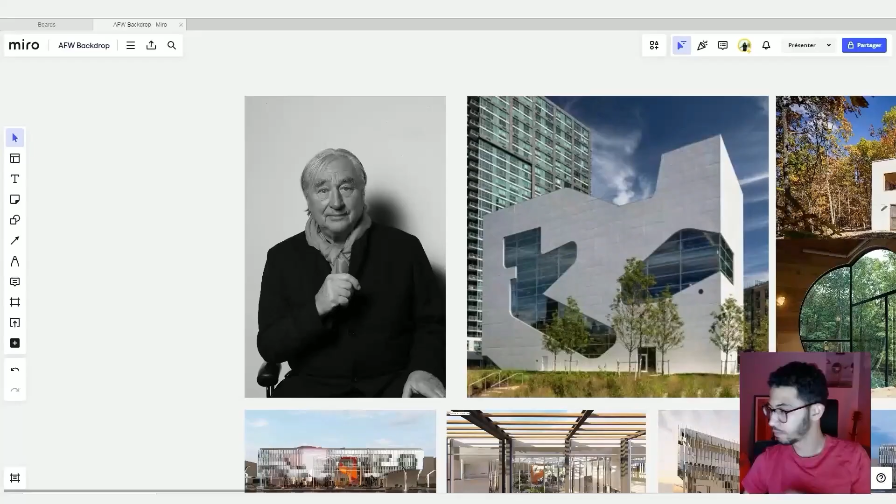My name is Mahmoud Ramdane. I am an architect based in Morocco, and I'm also a computational designer with a degree from the IAAC, Institute of Advanced Architecture of Catalonia. I'm having a very nostalgic moment right now, and so this is going to be a storytelling time.

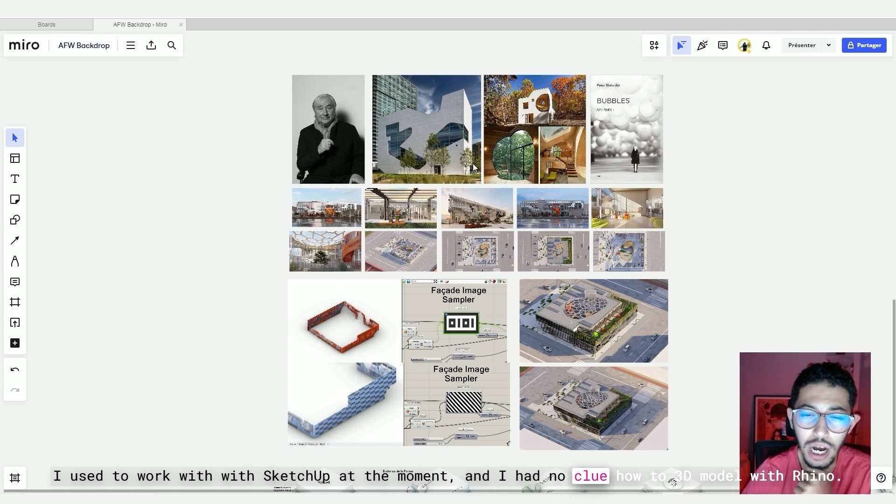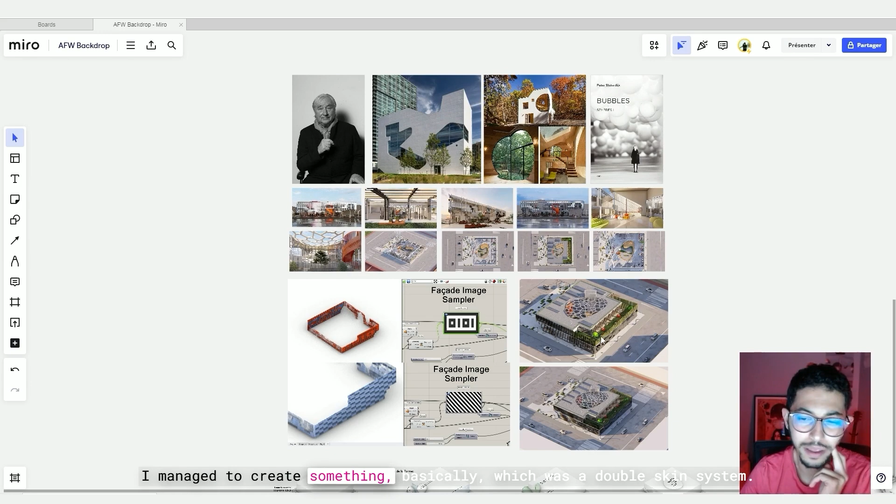I was studying in the architectural school, I think 5 years ago, when I decided at one point that I'm gonna start using Grasshopper. I used to work with SketchUp at the moment, and I had no clue how to 3D model with Rhino. All I knew was some little snippets, some little pieces of code I got from here and there, from YouTube tutorials and so on. And so it did work actually. I managed to create something basically, which was a double skin system.

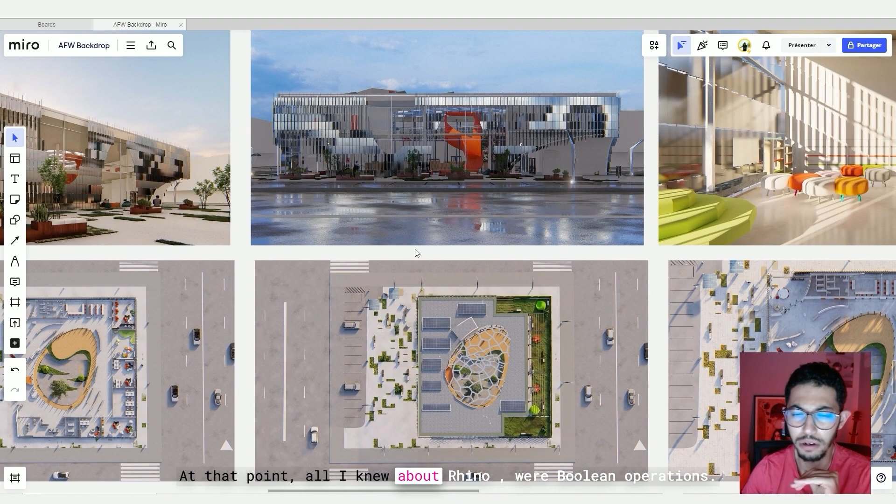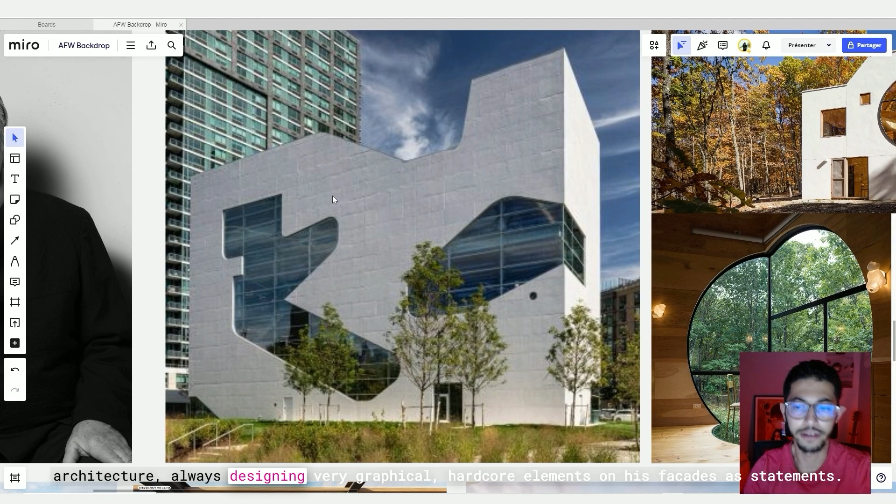So yeah, basically this is the project, and it was a competition that unfortunately we didn't win, but still it was supposed to be some sort of a smart library with smart components and so on. And so what we did is, we created form using Rhino. At that point, all I knew about Rhino were Boolean operations, and also being inspired by Steven Holl, and the way he makes his architecture, always designing very graphical, hardcore elements on his facades as statements. And what I like also about his buildings is that he uses a lot of spheres.

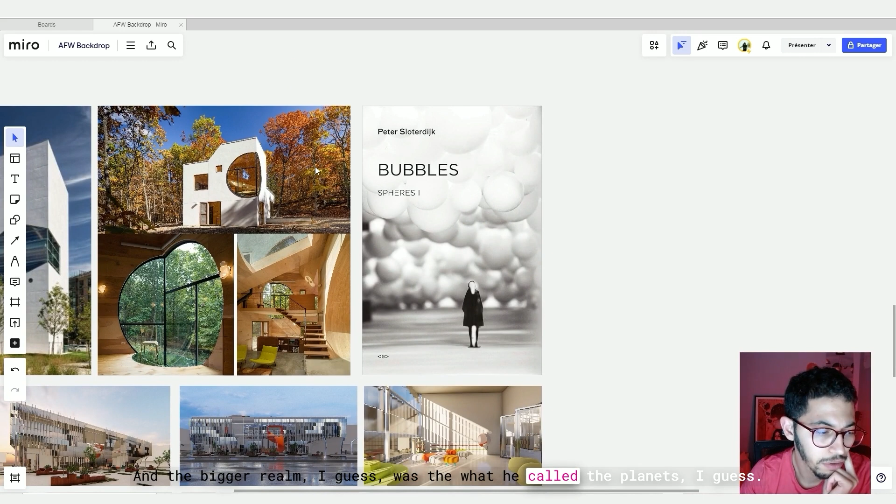I think I've heard in one of his interviews that he spoke about some book he liked, by a philosopher called Peter Sloterdijk, if I pronounced it right. The book is called Bubbles, where he speaks about being in this universe as intersections and meetings of many spheres, and each sphere has a center. And probably he alluded that societies are actually spheres on their own, with their own centrality, and so everything converges. He speaks of bubbles, the smaller realm, and the bigger realm, I guess, was what he called the globes. And the broader picture, when we zoom out, we have the foam, with multiple globes and small bubbles, etc. A very interesting take that Steven Holl actually uses in creating his own architecture.

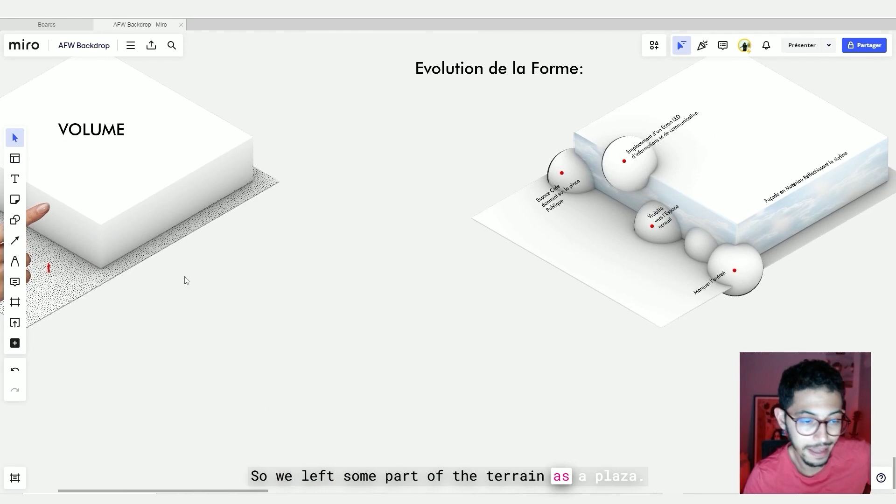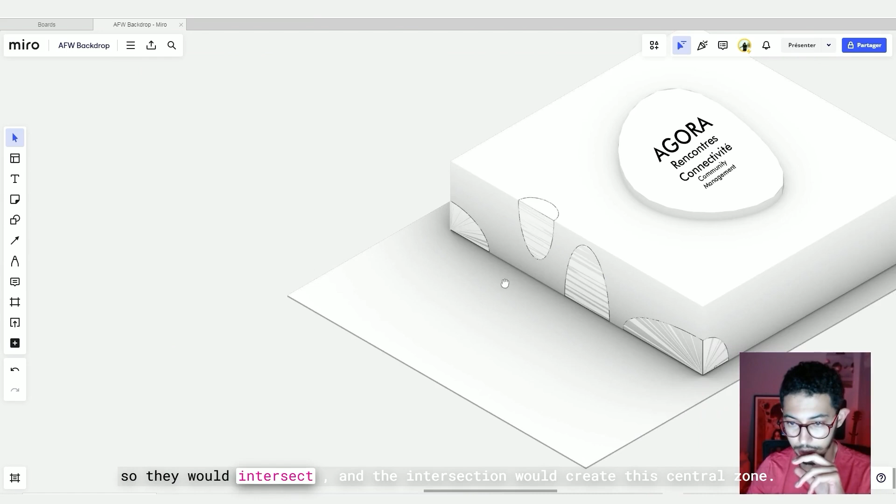And so at that point, all I knew in Rhino was actually to make Boolean operations. So speaking of this project, what we had was basically a volume. We left some part of the terrain as a plaza, and then we decided that everything had to have some sort of relationship using spheres that intersect this overall volume. And I wanted the facade to reflect the skyline of the environment. So basically just scaling the bubbles so they would intersect, and the intersection would create this central zone, etc. And then I would create the entrance, and many other things.

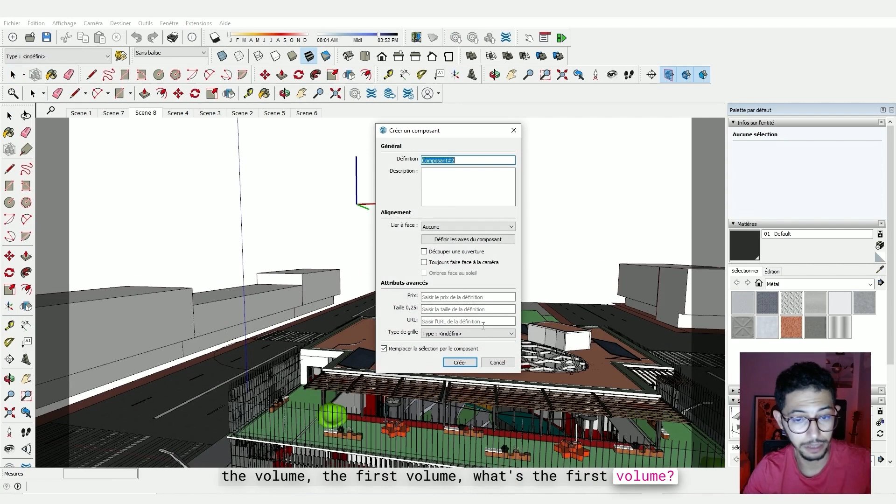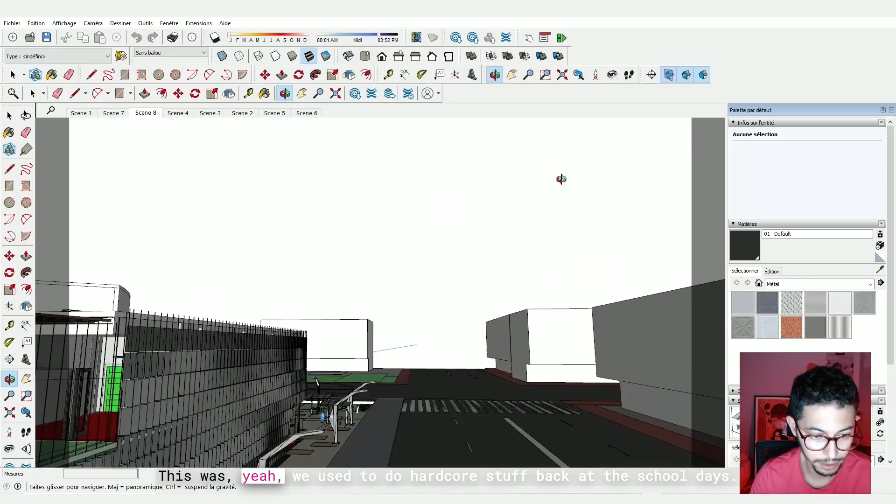And the second part was the double skin. So basically what I did for this project is that I made the first volume on Rhino, and because I didn't know how to use Rhino, I had to transfer my geometry to SketchUp in order to plug in my little components and families, 3D objects. And so you can see here that I have a full project. We used to do hardcore stuff back in the school days. We didn't sleep for this one.

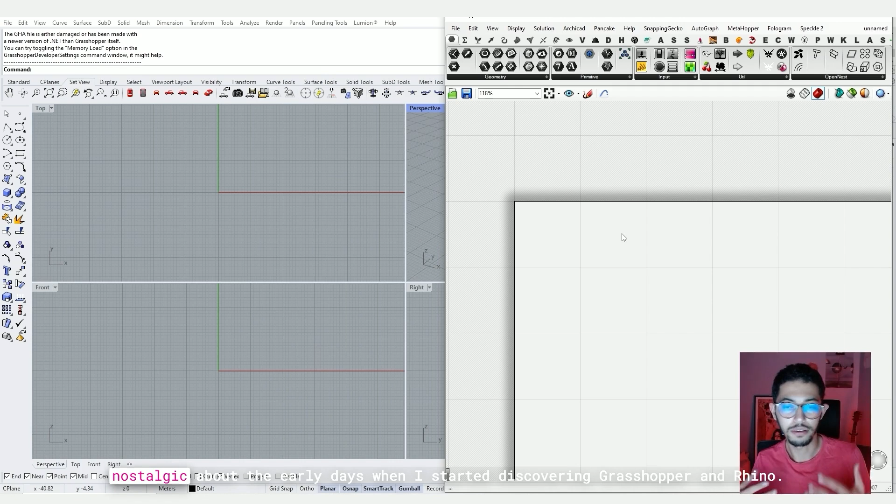Anyways, this is not why I am here today. I'm making this video because I'm a little bit nostalgic about the early days when I started discovering Grasshopper and Rhino. For a long time, while being a student, I only thought Rhinoceros was a software for modeling and Grasshopper was a software for crazy shapes and facade systems, etc. But as soon as I started working on my own stuff, I figured that no, that's not it. It could be something else. And it turns out that Grasshopper was so good at form finding. These types of diagrams were actually the steps that I used to think about my project.

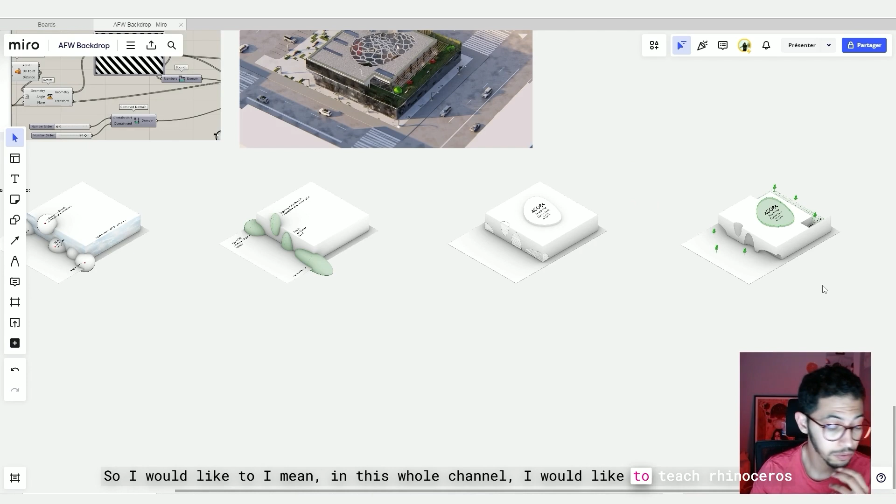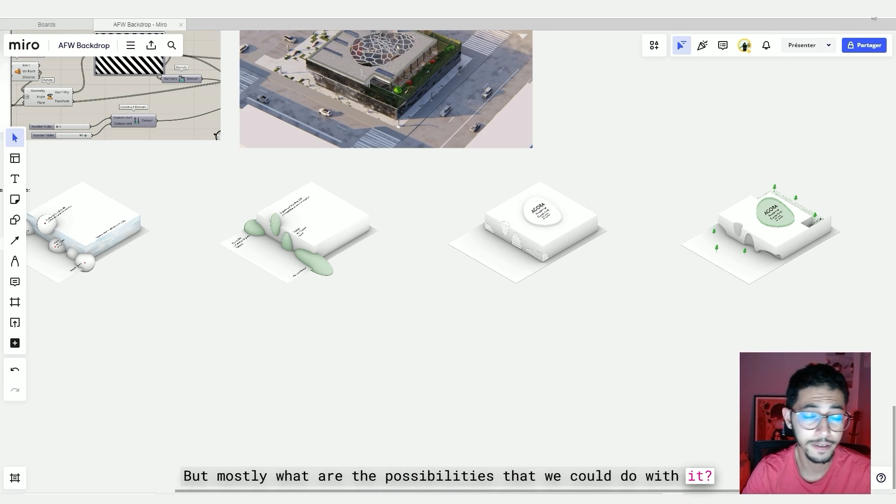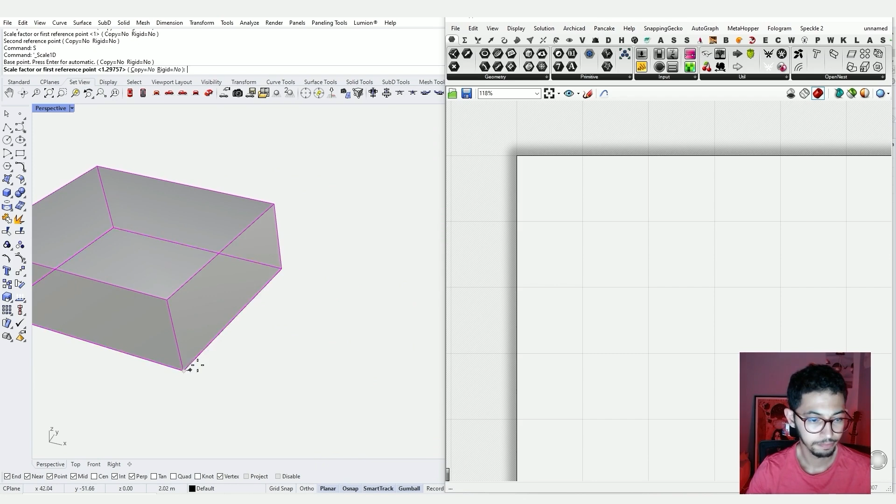So what I did basically is that I created this simple box. I'm just scaling it so it has some sort of a regular form. I have no clue how much is the height, so I would say the height is 24. That's too much, I guess. That's fair. And the length, let's say it's 35 by 35.

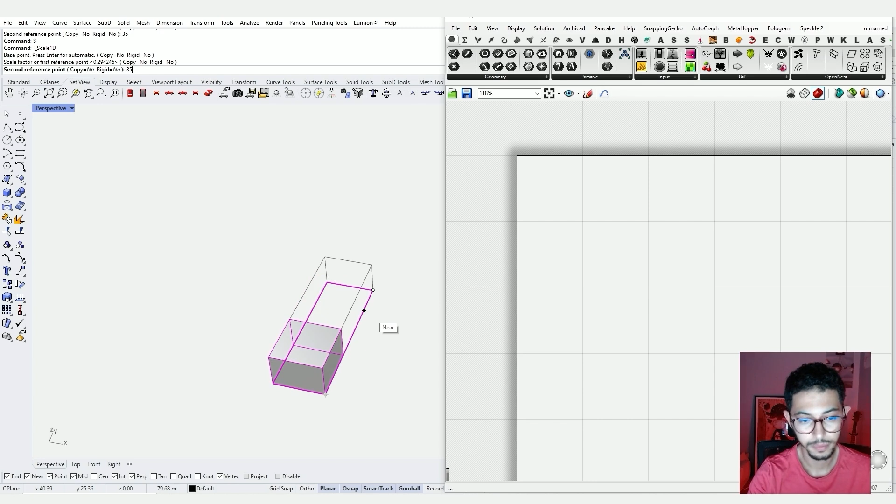Just using the command scale one direction. I'm gonna zoom the selection by using ZS, which is the shortcut for zoom selection, and then scale one direction again. Maybe I would want a 15 meters high building.

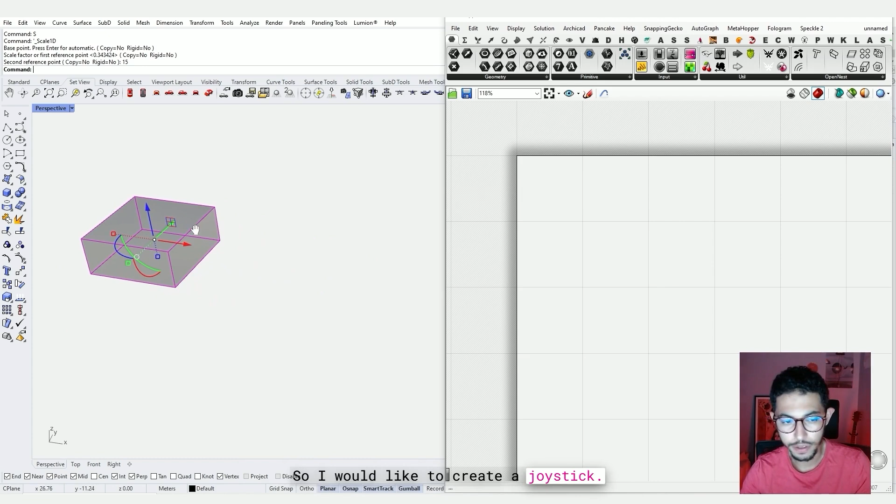So yeah, how can I use Grasshopper in this case? I would like to create a joystick. What do I mean by joystick? I would want to create some sort of a video game here. So I would start creating my spheres, right? And as I create those spheres, I want to see how they react once we make a Boolean difference and what type of space they leave to us.

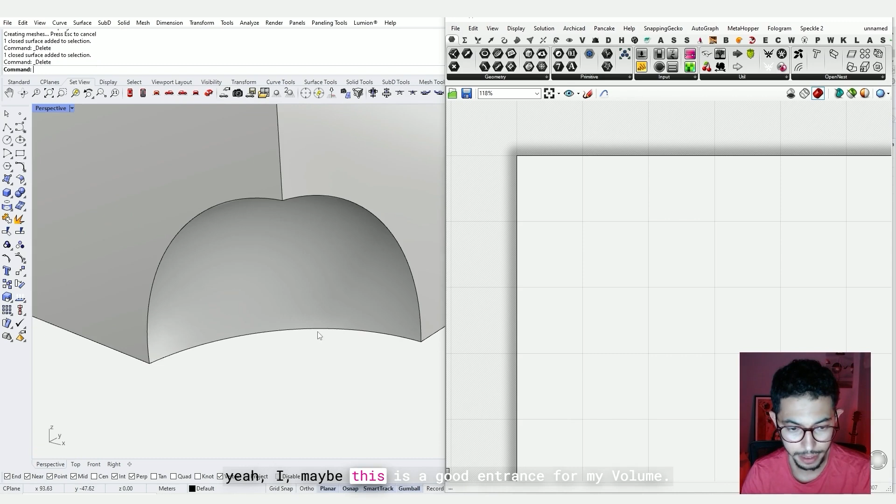So I just launched the command Boolean difference. They're asking me what are the Boolean surfaces to subtract from. I want to subtract from this one, yes, using these two guys here. And now if I delete these two, you can see that maybe this is a good entrance for my volume. Now I would isolate this volume and I would like to contour it.

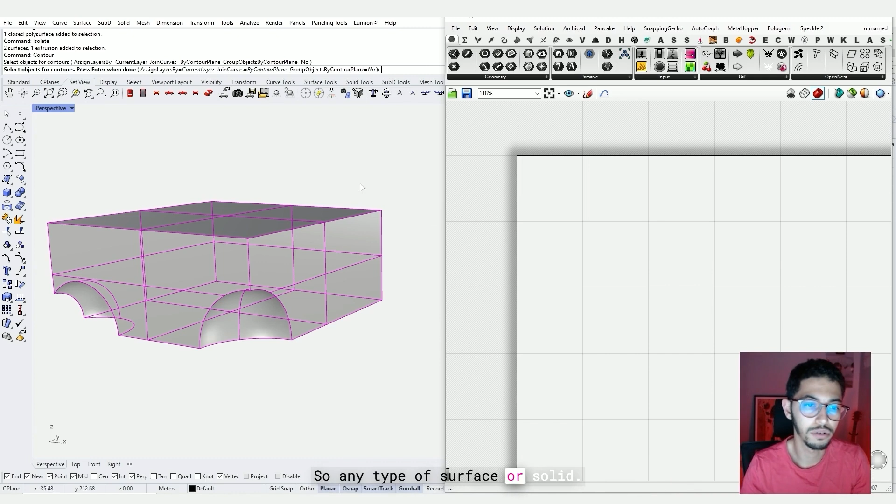So contour is a command that allows us to select a solid. It should be actually, oh no, it doesn't have to be. So any type of surface or solid. And we decide the starting point and an ending point, and then we decide what is the height, for example, of our levels. Let's say I would like to have 4 meters high levels. So it creates these polylines, actually, that I can then turn into a surface.

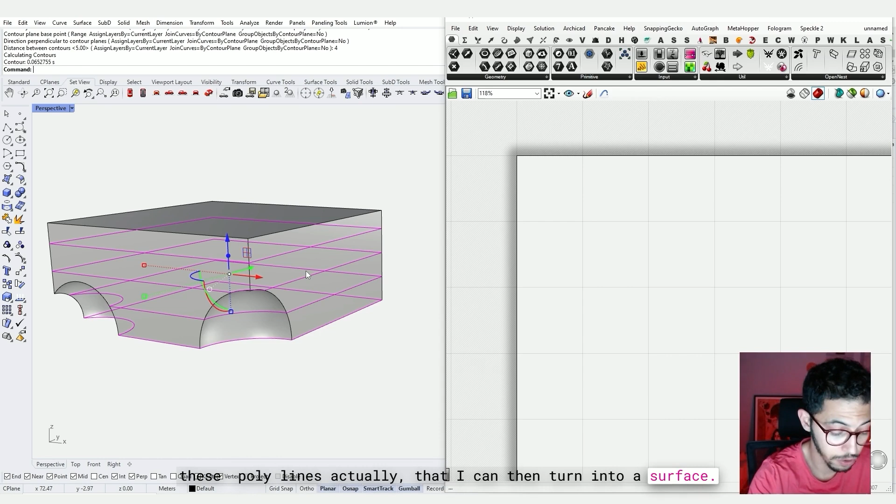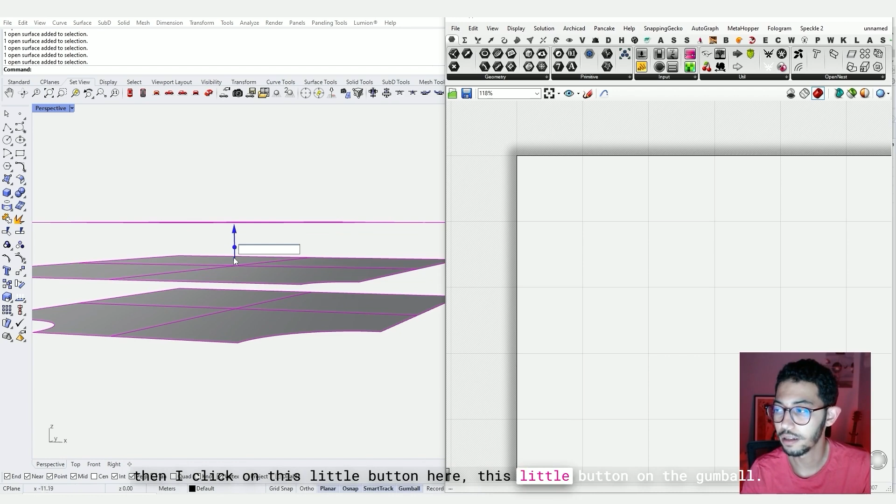Before turning them into a surface, I would isolate them also, and then turn them into a surface. Maybe delete the first one, and then just pick the surfaces, by holding shift, the 3 surfaces, and then I click on this little button here. This little button on the gumball will allow me to extrude in the Z direction, upwards.

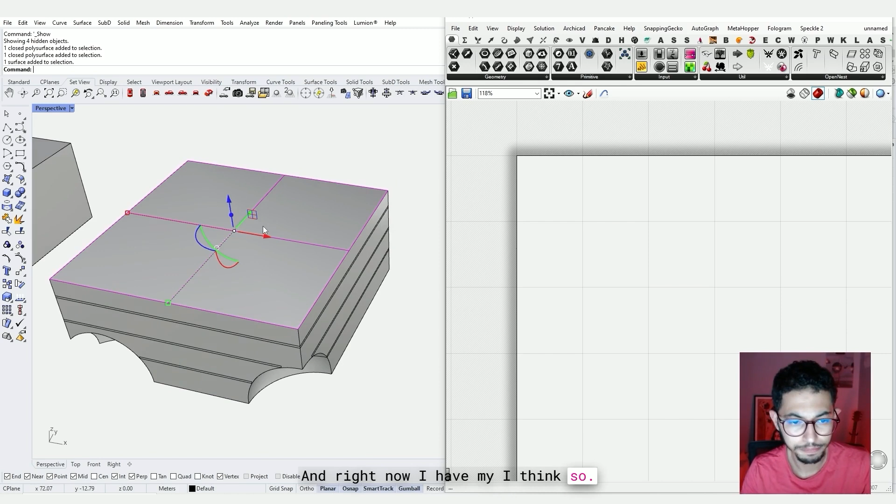If you cannot see this gumball or these arrows, you need to come here, down here, and activate it so it turns bluish. So right now maybe I would set 0.3 for the slabs, and right now I have my thing. So yeah, now let's analyze this. Here I have a full slab. Great. Here I have a full slab, but what is this?

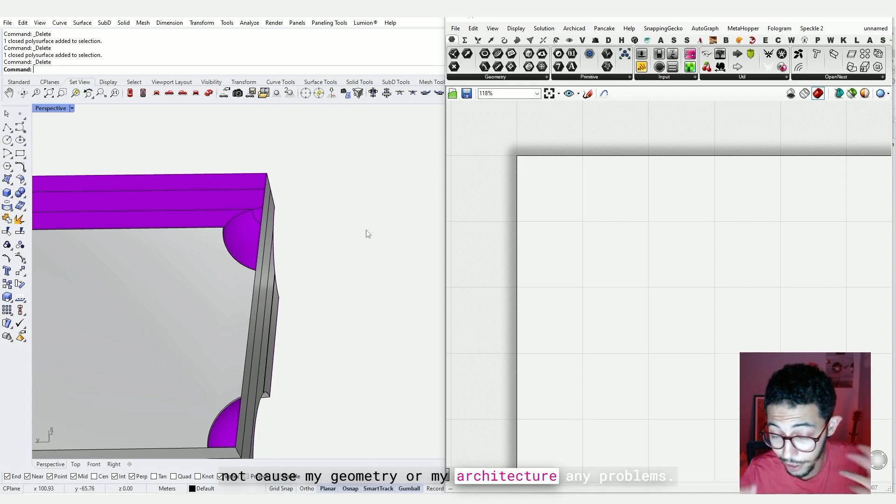Could this be beneficial for me? I don't think so, architecturally speaking. No one could sit here and watch something going downwards. There's no need for creating this half-assed circle. So probably this Boolean should have been way more well thought out in its exact place. So these are my conditions. I need to place my spheres in spots that do not cause my geometry or my architecture any problems. So this is why I opened Grasshopper.

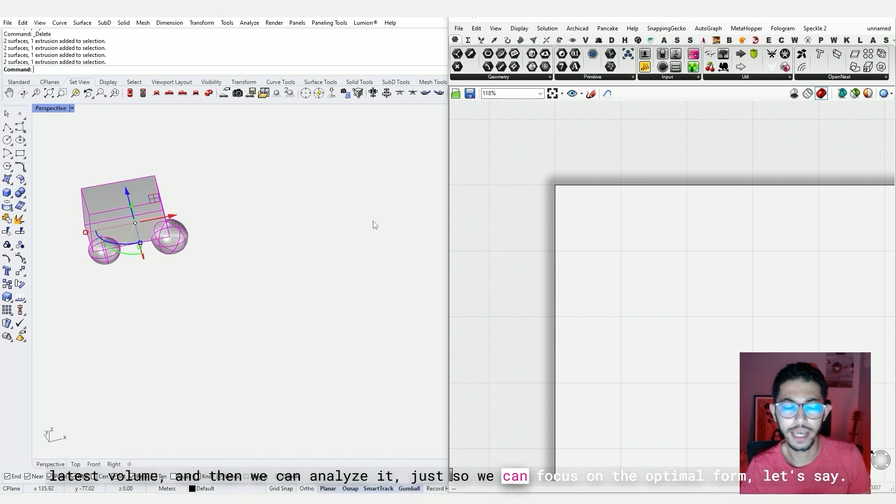So we would start generating some sort of a joystick, like a video game thing, where we can start drawing stuff here on Rhino, and at the same time it would show us the latest volume, and then we can analyze it, just so we can focus on the optimal form, let's say.

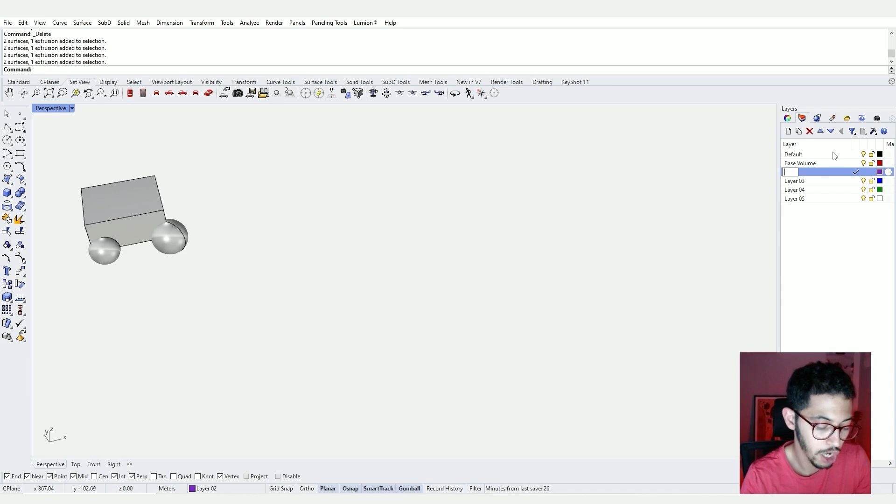Great. So before I start using Grasshopper, I would like to do some organization. I will go through my layers and call the first one base volume, and call the second one carving volumes. It's like we're carving the volume, right? So my carving volumes in this case are the spheres. So I'm going to select the spheres, hold shift to select multiples, and click and then change object layer. And also for this one, because it's my base volume, change object layer.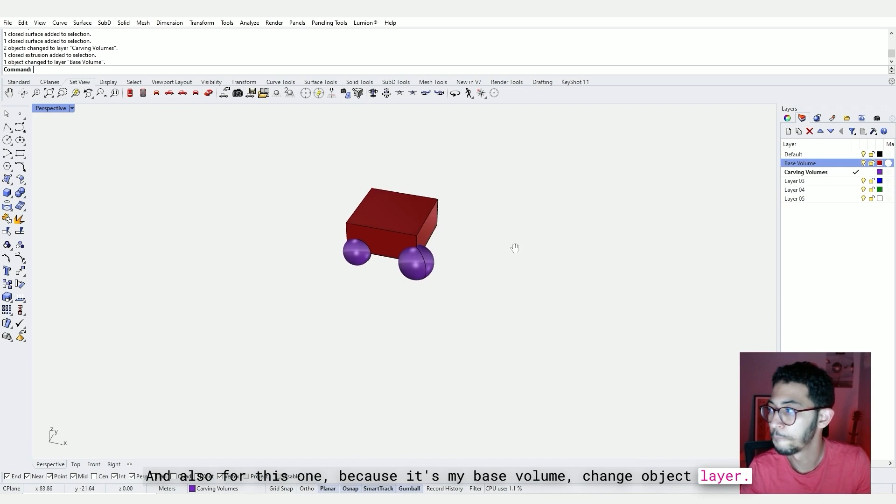And so I want to be here on the carving volumes layer. Now you see it's my current layer. That means anything I'm gonna draw is gonna be on this layer. Why? Because we have this little tick in here. No worries, let's see this later.

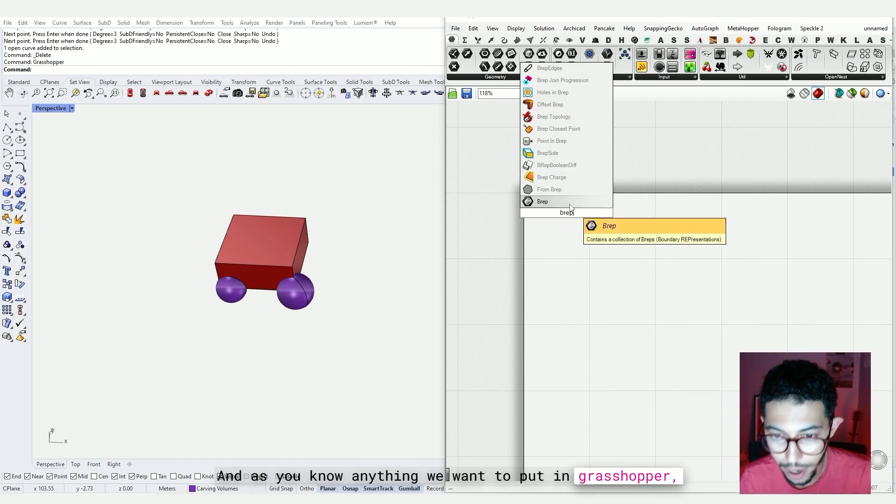So I open my Grasshopper, and as you know, we will need to reference these geometries inside. So in order to reference any geometries, we should come to the params tab and then look for the brep, which is actually short for boundary representation. Let's understand it this way. Anything with a boundary, anything that's solid or surface, can be integrated in this little library.

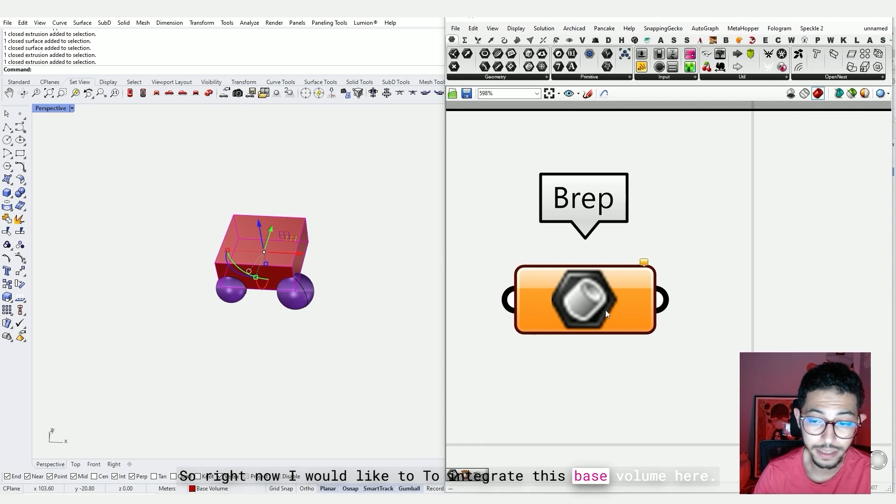And you can also see that it's yellowish, I mean orange, which means that it is empty, or that there is a problem. And this little balloon tells us that the brep failed to collect the data, which means there is no data to start with. So right now I would like to integrate this base volume here. So I right click, and then I set one brep, boundary representation. It turns gray, that means it has information.

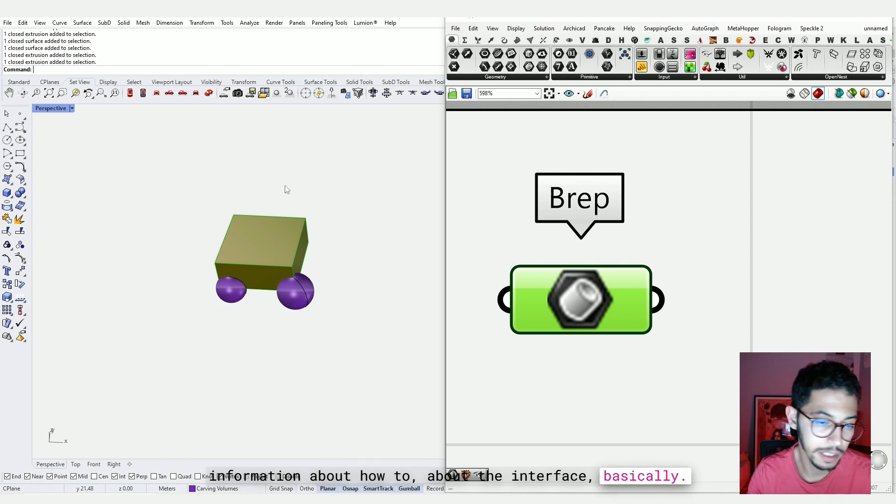I'm gonna start rushing from now on. And if you didn't see my first videos, I advise you to look at them really fast, because those are the ones with the basic information about the interface, basically. And so right now I need to name this, so I'm gonna Control G it, then right click and call it base volume.

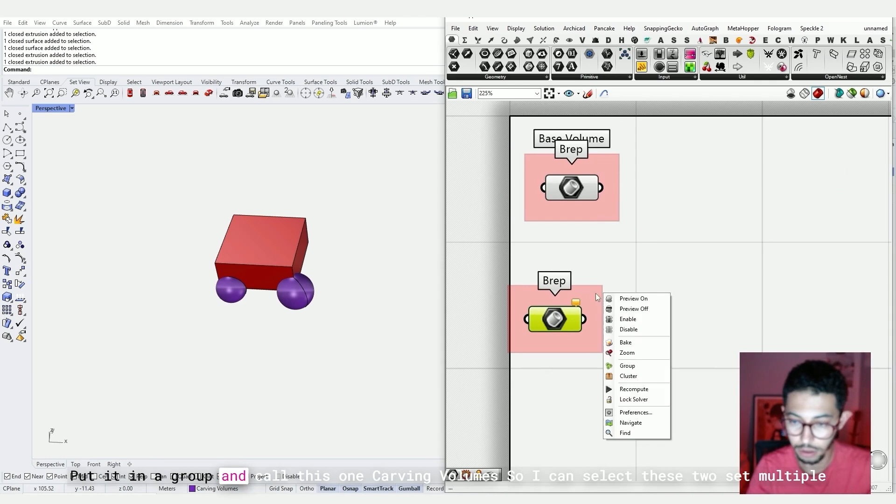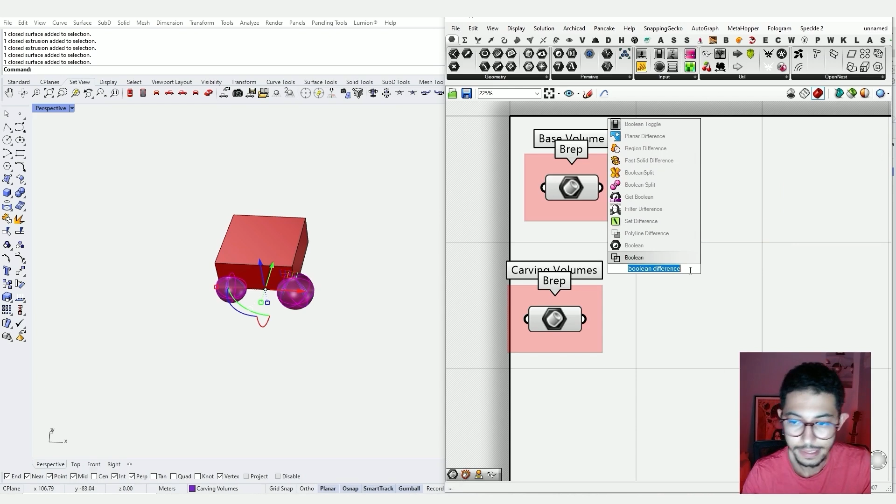Right, and then I'm gonna create another one, put it in a group, and call this one carving volumes. And so I can select these two, set multiple breps, and then use a boolean difference, right? Difference. I mean, it should exist, right? The thing is, in Grasshopper, it's called solid difference, not boolean difference, solid difference.

So brep A is the yellow one, it's the one that's getting cut. So the first one is the base volume, and the carving volumes are the B. Great. So now I notice that there is something that's happening. We have overlap in geometries.

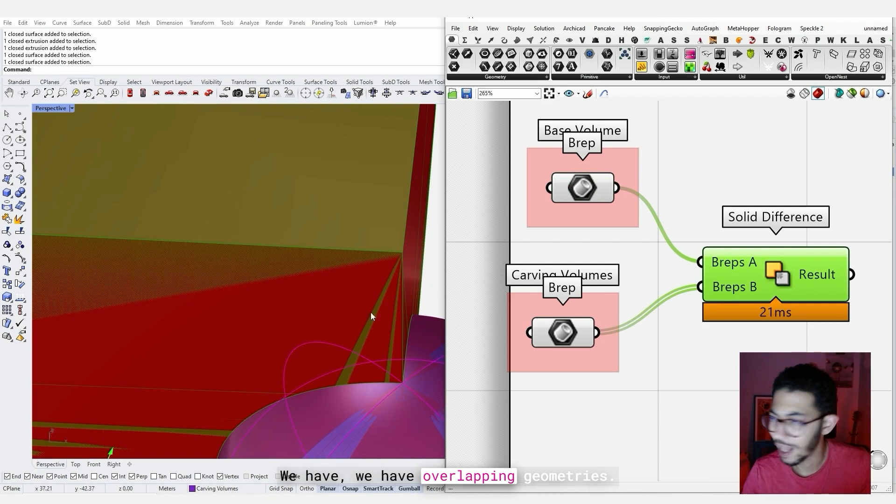Let me hide everything that I've already drawn on Rhino. And also let me deactivate the preview for this one. It turns dark and gray, which means the geometry is there, but it's not visible. Nice. And also I would do this for this one here. Preview off. You could use Control Q for it to be fast. And so what I see here is actually my geometry.

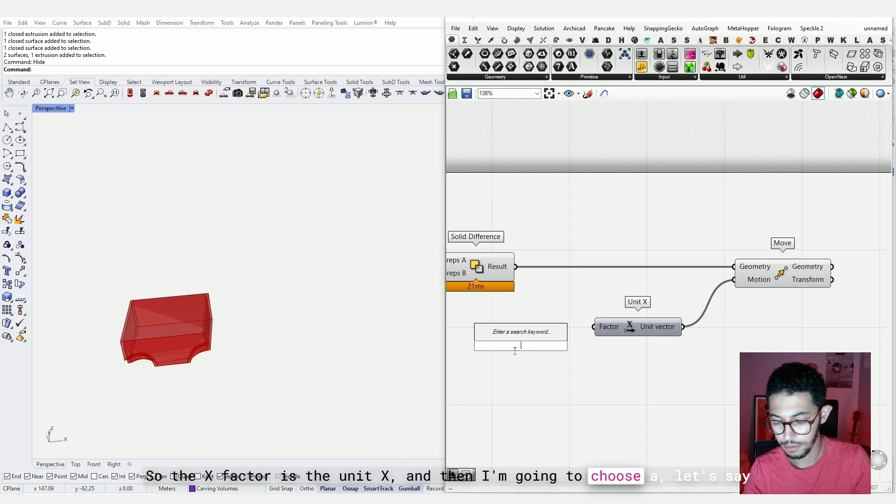And what would be interesting also is to move my geometry somewhere in the X vector. I'm gonna move it left or right, wherever. So the X factor is the unit X, and then I'm gonna choose, let's say, 30 meters. Let's move it by 30 meters, maybe a little bit more. For that I called a number slider. Remember that.

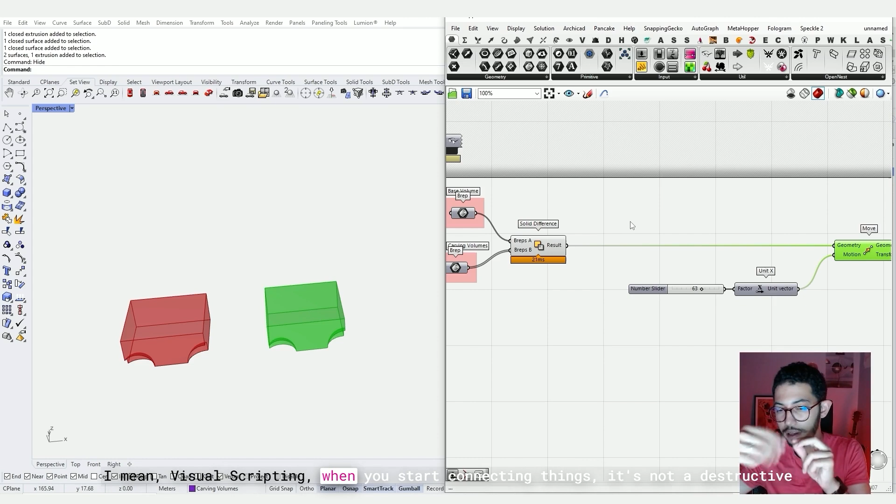And now what I could do is actually deactivate this one. As you can see, we have the first one and then the second one. So from here we can understand that Grasshopper is a non-destructive process. I mean, visual scripting, when you start connecting things, it's not a destructive process because it always keeps the geometry in its respective little components. So for example, the difference was made here and then it was moved. This is why we have two geometries.

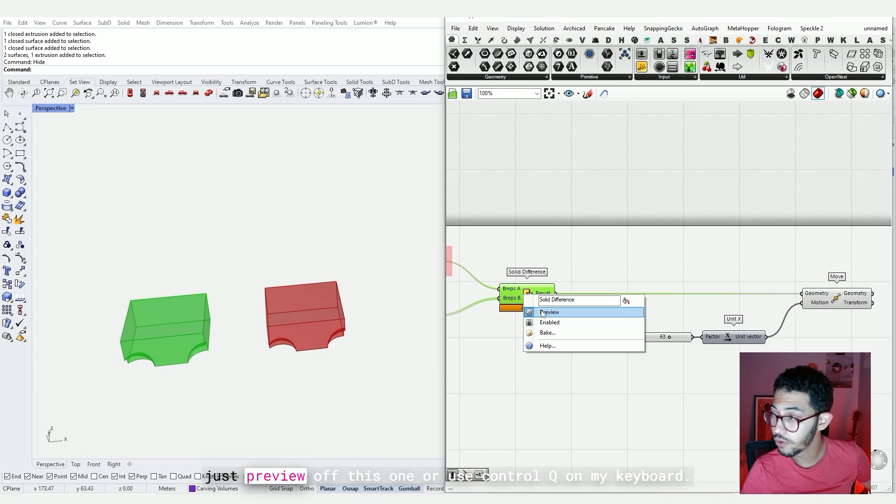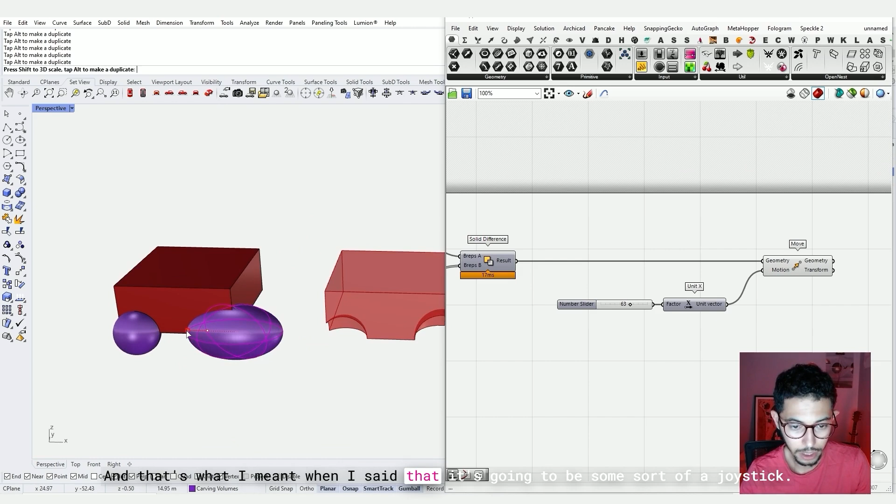And for now we can just preview off this one or use Control Q on my keyboard. Then I'm gonna show back everything. And now what's cool about this is that I can start changing the placement of my spheres. And that's what I meant when I said that it's going to be some sort of a joystick. Crazy, right? Boom, damn.

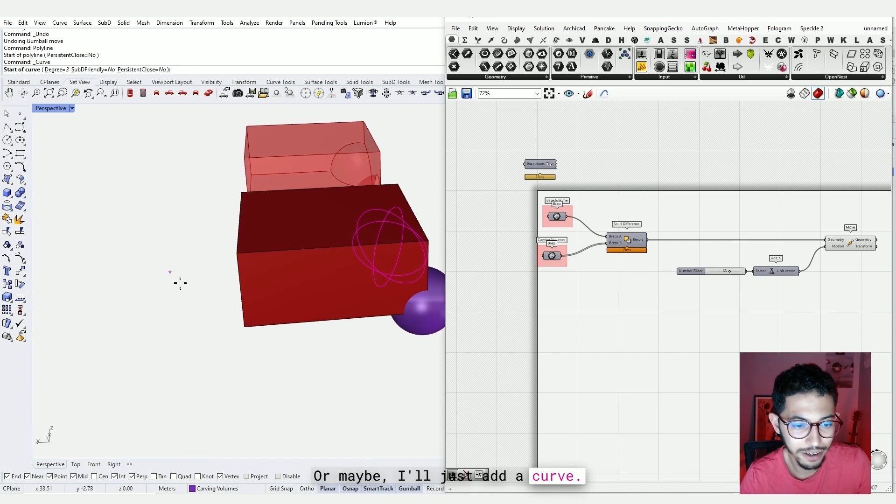Anyways, I want it to be more user-friendly. Maybe I would want to add more spheres, let's say. Or maybe I'll just add a polygon. Or maybe I'll just add a curve. Voila. And then this is a closed curve, turning it into a surface by using the command planar surface. I extrude it upwards. Maybe I would want to add also this one. In this case, it's gonna be tiring.

Anyways, I will need to come to the B-Rep, click, and then manage the B-Rep collection. I notice that I already have two inside, which are the two spheres. So now I need to add another item. So I would select this one and click, voila. And now I would notice that this one also cuts. Yeah, this process is interesting, so I would like also to automate it a little bit. I'm holding Alt actually to drag.

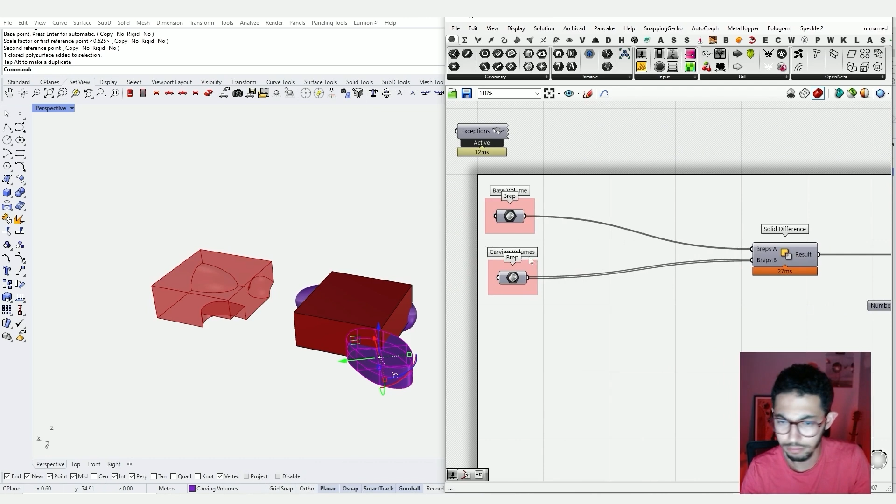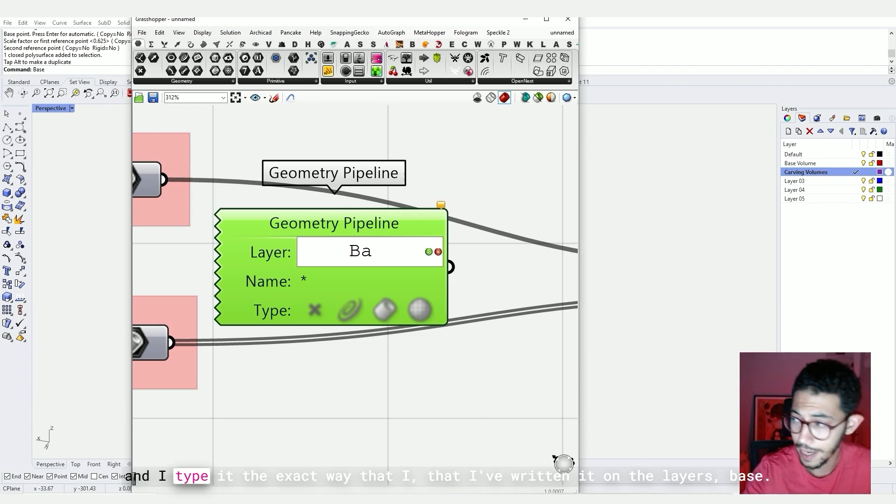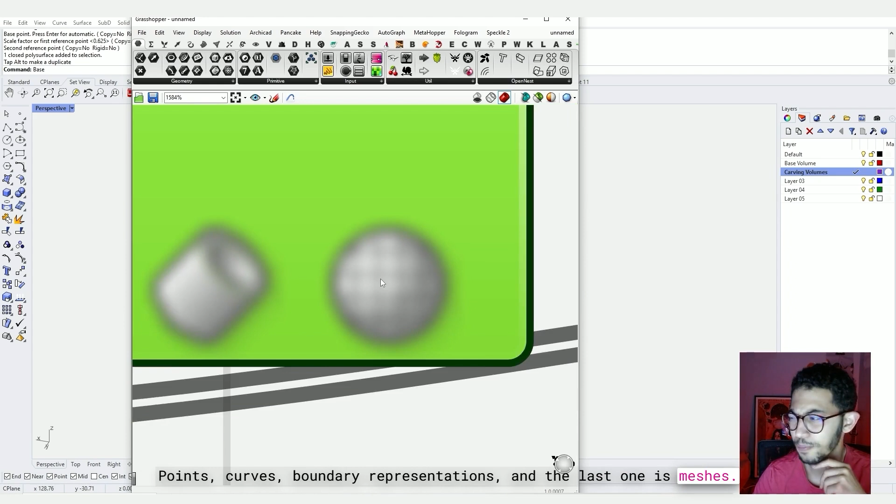Yeah. So here I would like to introduce you to a new component called pipeline. What is a pipeline? A geometry pipeline. So a geometry pipeline is some sort of a listener. For example, if you give it a layer, for example, base volume, and I type it the exact way that I've written it on the layers, base volume, and here I can decide which type of geometry I want it to listen to. Points, curves, boundary representations, and the last one is meshes. Maybe we'll see later what a mesh is. For this one I wanted to pick every B-Rep, so I double click it.

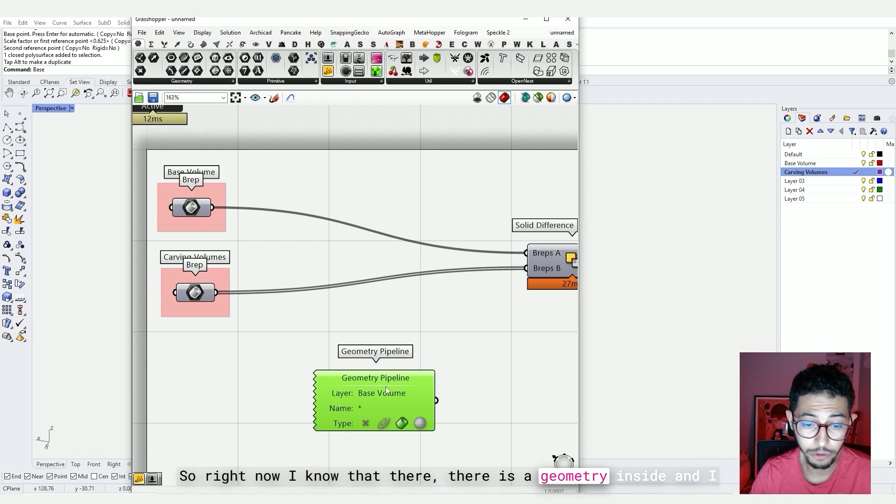So right now if I put a panel, just go back to the older videos please, if you don't know what a panel is. So right now I know that there is a geometry inside, and I would copy and paste the same thing and apply it for my second layer, which is carving volumes. And then I click OK. Now I can delete these two. And I know that my base volume is this one, and my carving volumes are these ones.

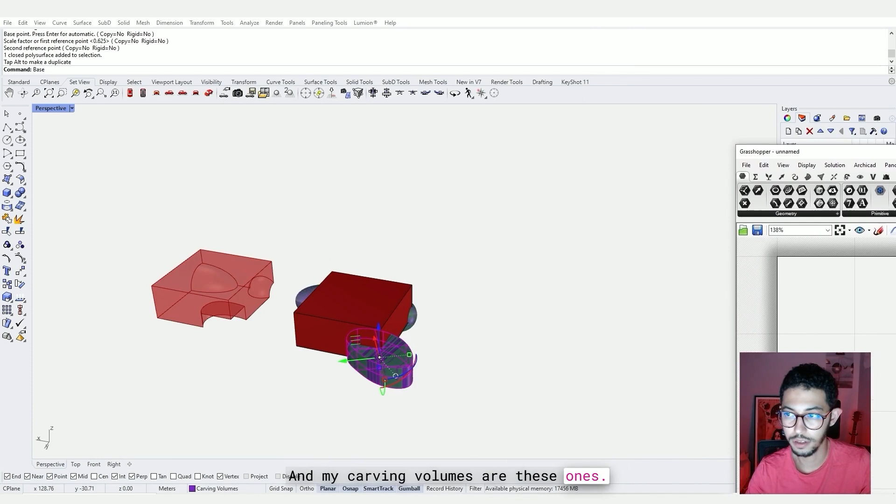So automatically, whenever I draw a new shape on this layer, it is going to sculpt the joystick volume. Let's move it a little bit farther away. Yeah, so in some sense, it mimics a little bit the process of some architects, right? And look at this little detail here. Anyways, this is nice because it actually allows me to visualize my volume. But of course, if I decide that this volume is going to be the right one for me, I'm gonna have to make sure that the floor plans are not very bizarre, right?

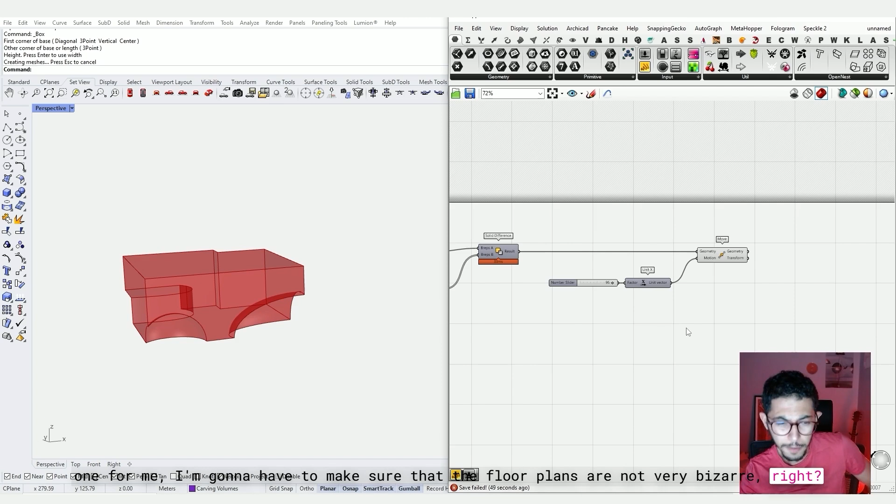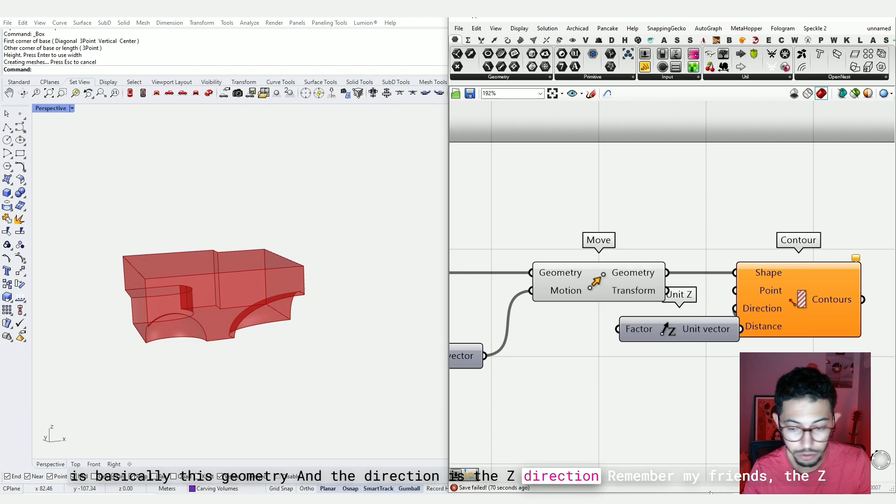So let me draw the floor plans. Remember the old command on Rhino? A lot of them are very similar between Rhino and Grasshopper. So the command was called contour. I'm gonna relaunch the contour command, and I'm gonna decide which shape I want to contour, which is basically this geometry, and the direction is the Z direction. Remember, my friends, the Z direction is always upwards, so I want to slice it upwards. And now let's assume a distance. My distance is going to be 4 meters.

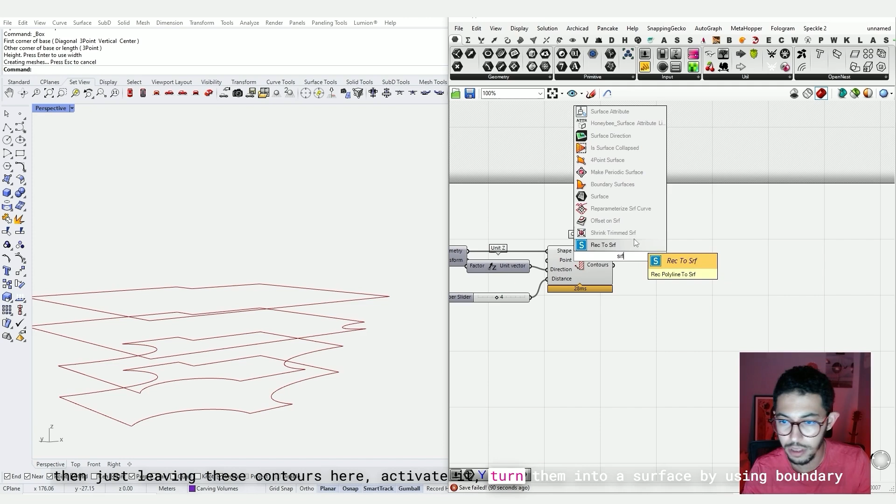And now, since I've drawn this, I can start previewing off, and then just leaving these contours here activated. Turn them into a surface by using boundary surfaces. That's the command for it. And then extruding them, the base in the Z direction by 0.3.

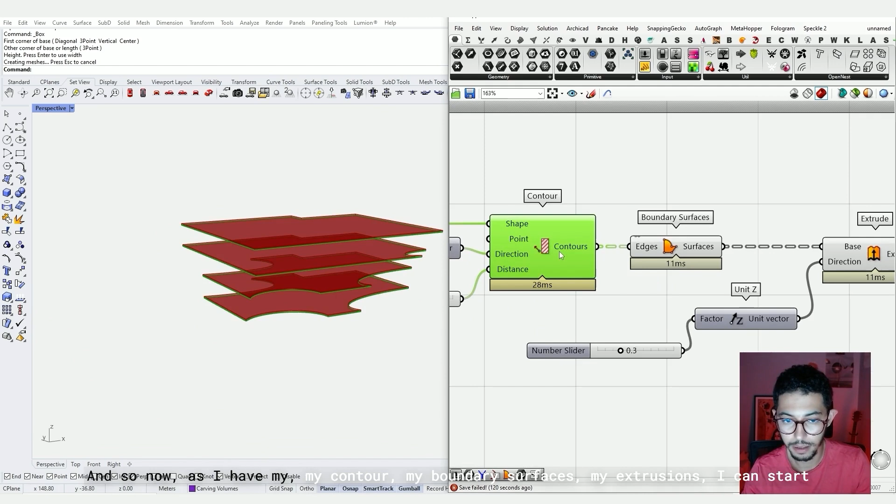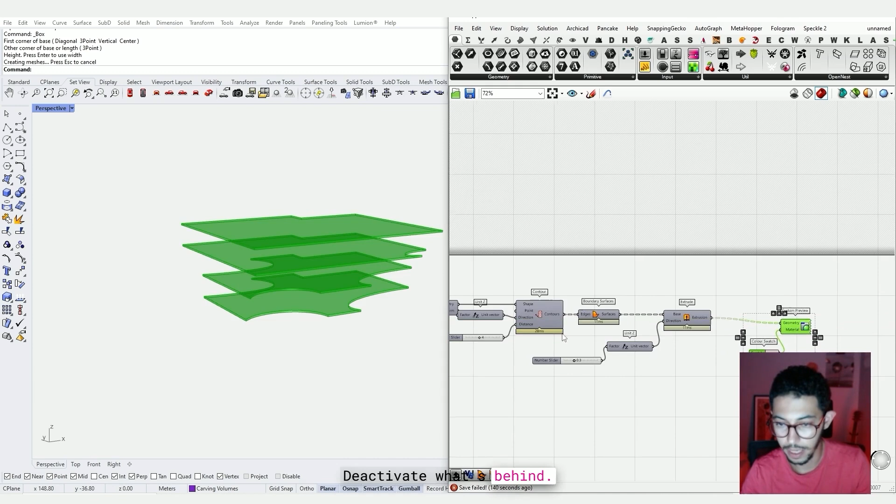Great. And so now, as I have my contour, my boundary surfaces, my extrusions, I can start giving them some colors. Colour swatch, and then preview, custom preview and color swatch. This is the combo for colors, basically. Gray, deactivate what's behind. As you can see, I always deactivate everything that's behind. It's always dark gray, so I only see what I would like to see.

And also now I can visualize the move geometry, which is here. Let me show you back everything here. Yeah, so it's my joystick, and now I can also change the, let's assume it's glass, bluish hue, and then change the transparency. This looks nice, also very diagrammatic.

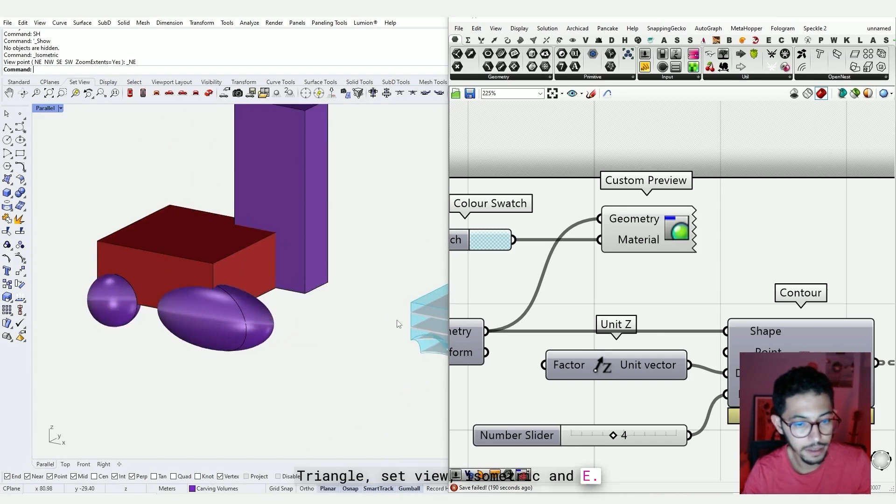Also, I'm gonna go set view, click on this little triangle, set view, isometric NE. So right now I'm looking at my floor plans. I guess this one is fun. I mean, if you're standing here and this is your volume, this is your architecture, someone is standing here and there's a railing of some sorts, that could be interesting.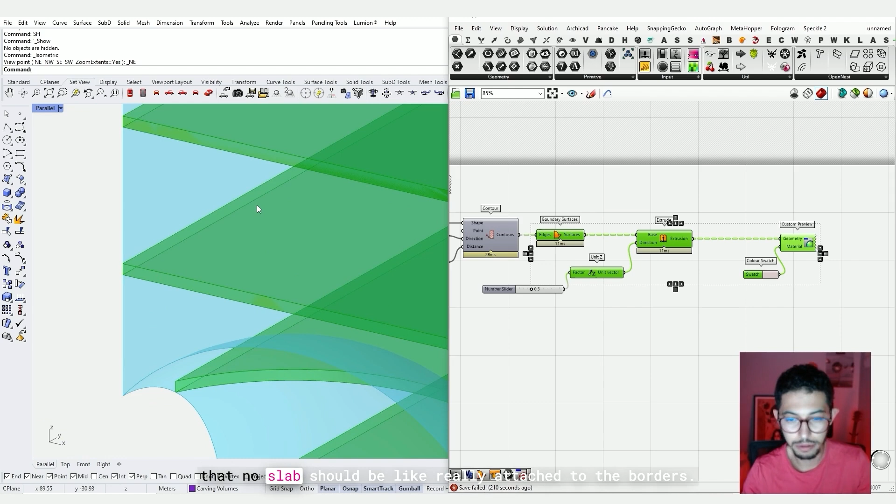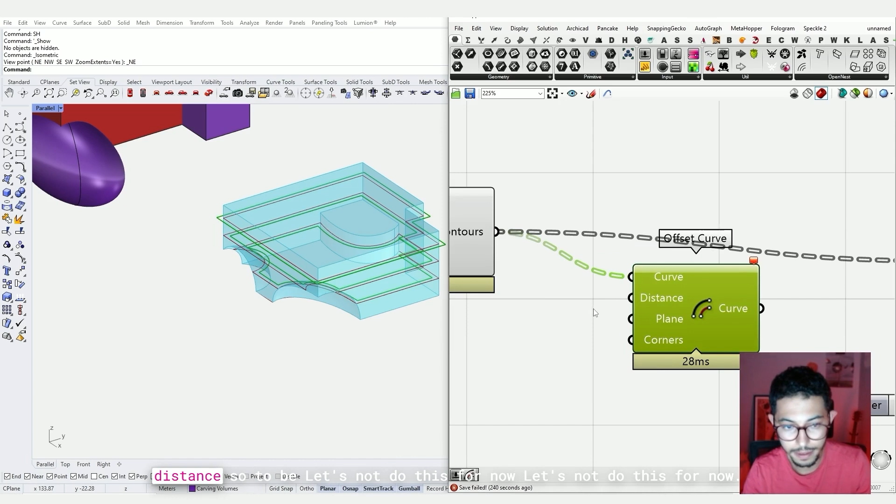Also, I just remembered that, let's assume that no slab should be really attached to the borders. Let's just offset them so they would back off a little bit. Gonna use my contours here, deactivate the custom preview, activate my contours, and then maybe offset them. Offset curve. So these are the curves to offset, and I can set my distance. Let's not do this for now. Yeah, forget about it. So right now I have my volume, my floor plans.

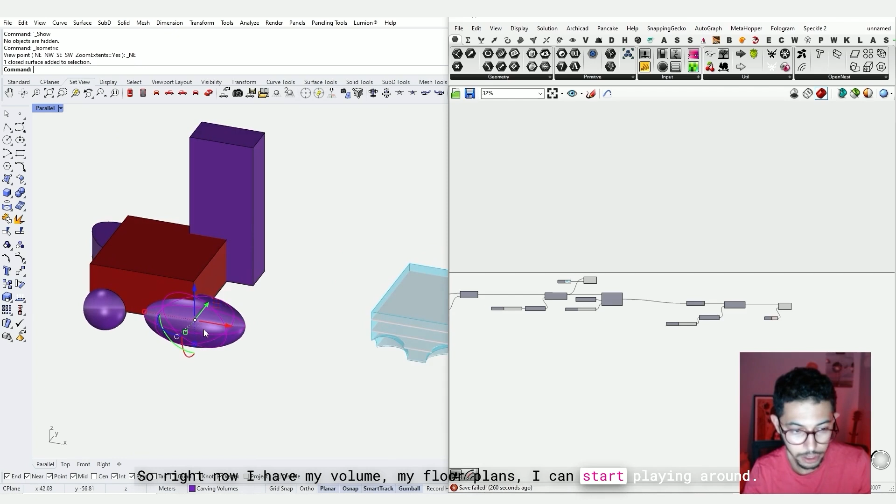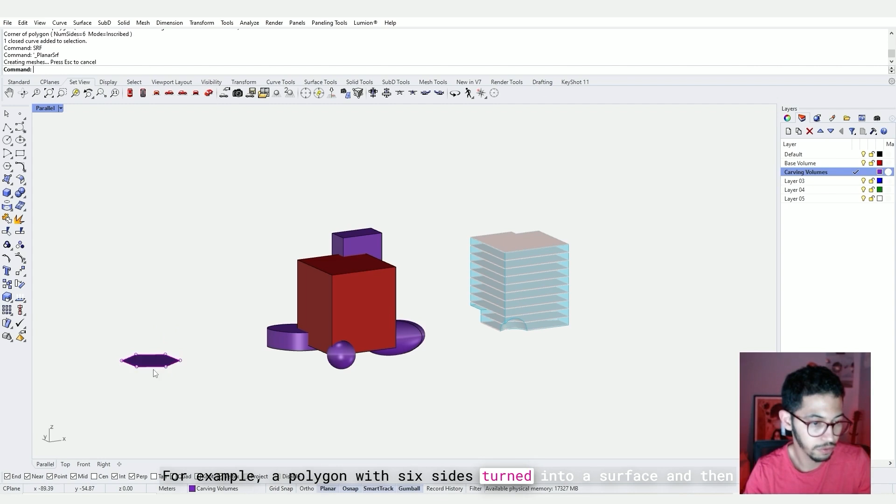I can start playing around. I'm just gonna take Grasshopper too. Damn, that's also nice. Yeah, so now you know what a joystick is. If I add, for example, a polygon with 6 sides, turn it into a surface, and then extrude the surface and give it some weird rotation and pick it up. Okay. You know what I mean? It's actually very interesting, as some kind of form finding.

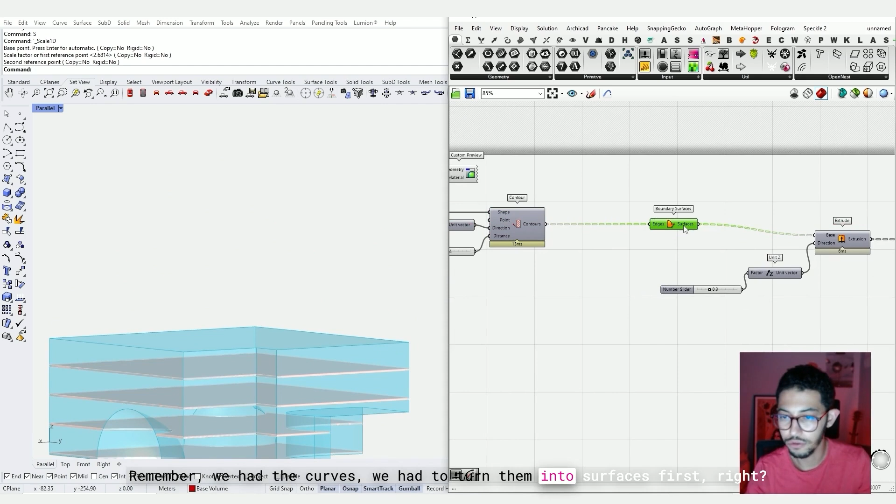So anyways, as I'm doing this, some of the other things I would like to know about my architecture is actually the area. The area of my surfaces. Remember, we had the curves. We had to turn them into surfaces first, right? In order to extrude them. If I only extruded the lines, look what happens. It only extrudes the shells. So normally the basic thing to do is to create the lines, turn them into surfaces using boundary surfaces, and then extruding the surfaces. So that's one to take.

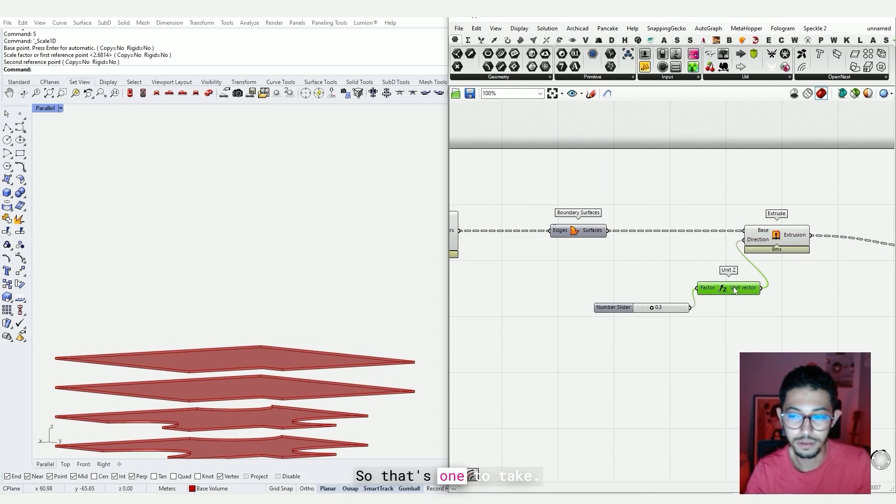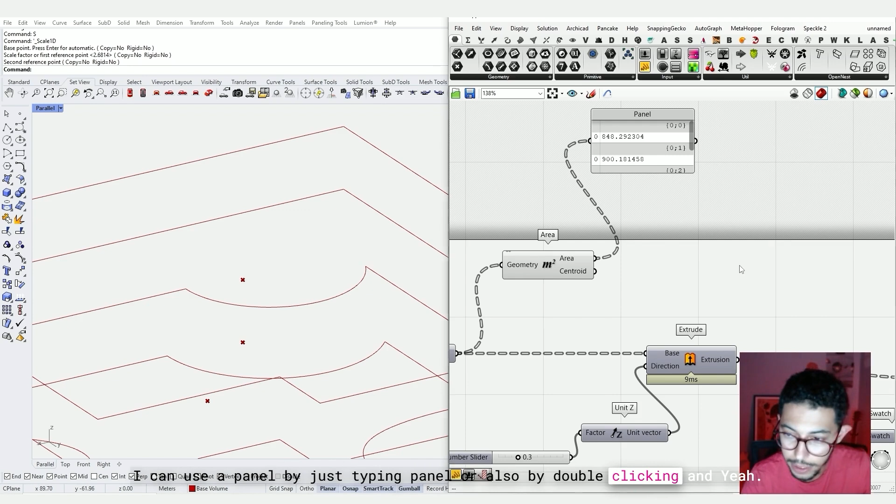And now I can use these surfaces with the command called area, which is a nice command that would find the centroid first, the central point, and also it's going to find the area. I can use a panel by just typing panel, or also by double clicking and two brackets. It gives me a panel. So right now it gives me the area per meter square. I can turn it into an integer so I don't have the numbers after the comma.

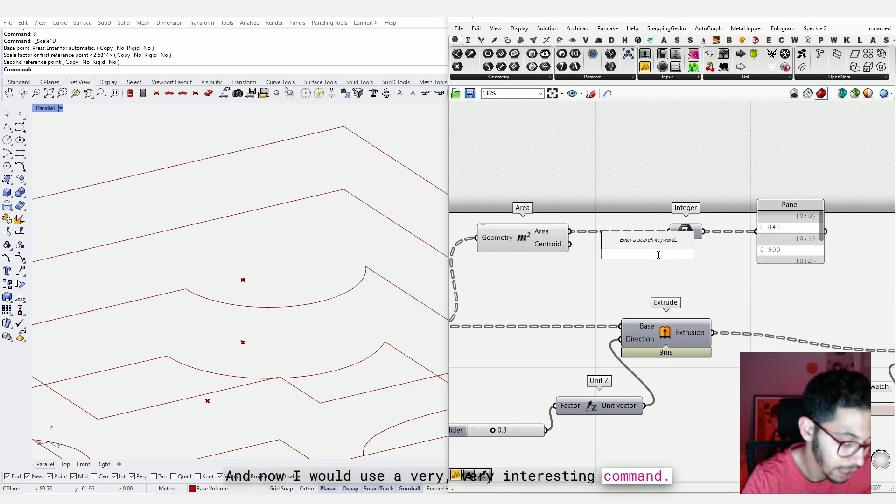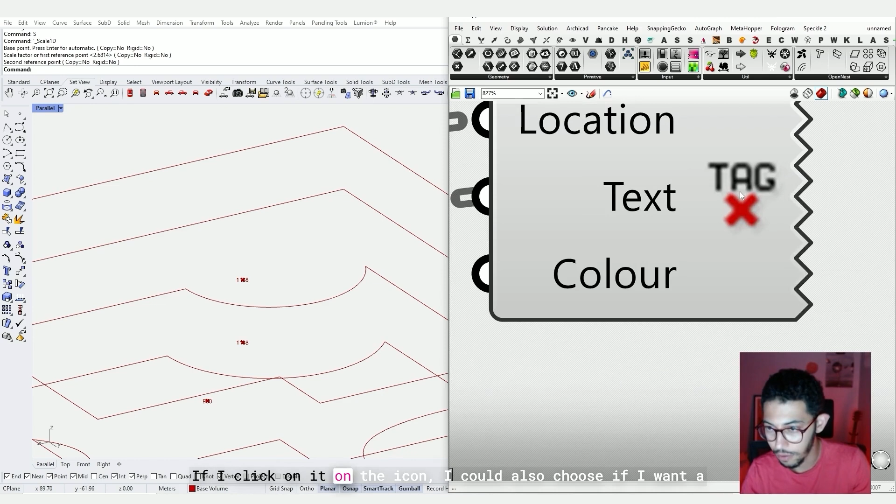And now I would use a very interesting component called text. What is it? Tag, I guess. Yes, text tag. So what it does is that it takes my text, which is these integers, right? And it puts it into its respective locations. If I click on the icon, I could also choose if I want medium, large, etc. I can deactivate this one, and now I know how many meters square I have on each floor plan.

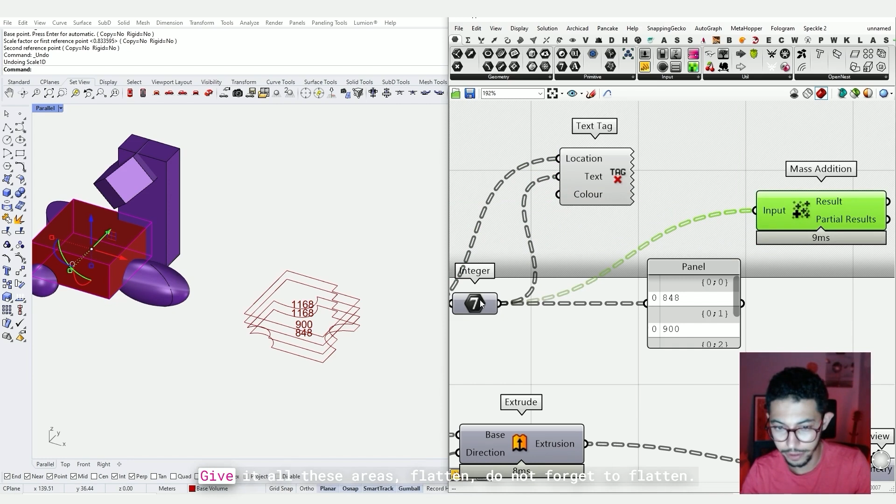And from here I can start deciding if my volume is too big, if my volume is too large. Do I have enough place for my program, for example, if I'm working on a competition? I could also, you know, do this. I could do everything. And what could I do? Yeah, I could make a mass addition. So I would give it all these areas, flatten, do not forget to flatten. And then it would give me the overall surface, in meters square.

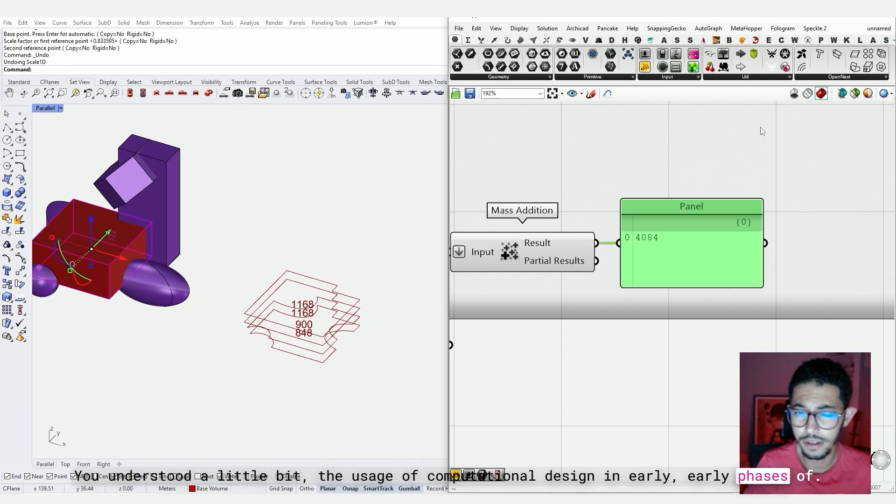Until now, I guess you understood a little bit the usage of computational design in early phases of the process, because it allows you to calculate in real time. Yeah, and also everything is automated using these geometry pipelines. I guess that would be it for today.